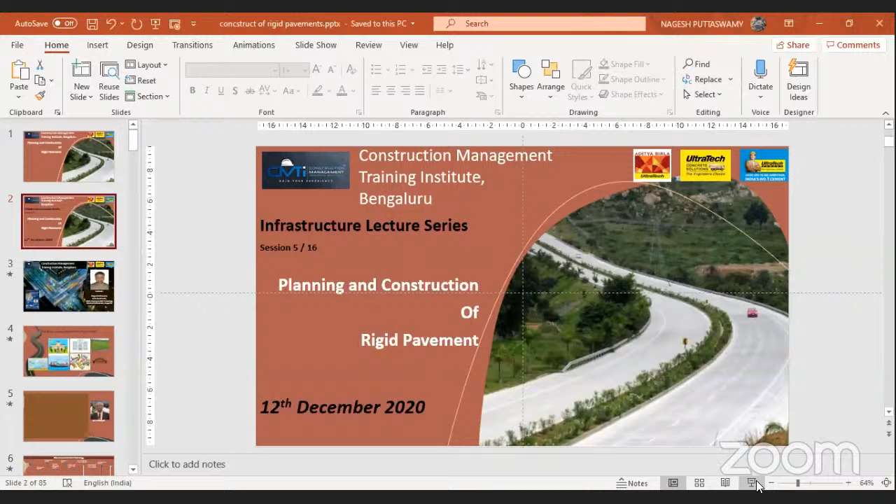Thank you, and thank you for that nice introduction. I would share my screen now. Yes sir, please. I hope it is visible now. Visible, sir, it is visible. Okay, that's fine. I'm getting a box here. I will minimize that also so that I will be able to talk about this.

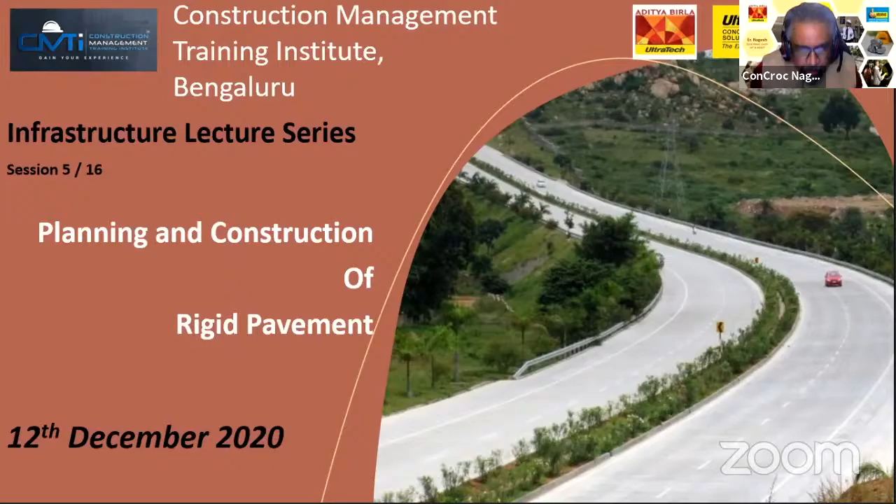Infrastructure is one thing that we all look at in a diversified way. Infrastructure for one is different, and infrastructure for another is different. When you look at infrastructure for the entire nation, it is on a different platform. It's also important to note that the way infrastructure is looked upon, and the way infrastructural development is taken up in any country today, depends upon various things. In many developing and upcoming countries in the top league like India, we have a norm that the best infrastructure available in the country will attract the best economics and the kind of business that can come in for that country's development. That is what I will be talking about, so let us go further.

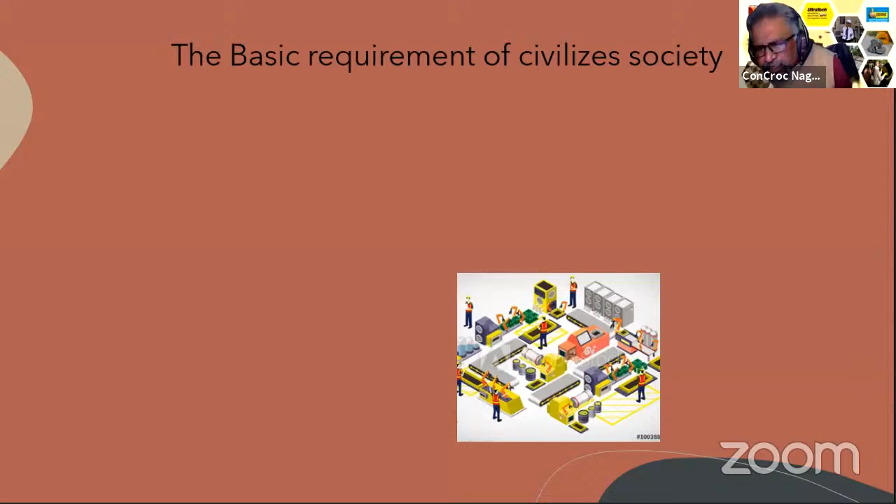So what are the basic requirements that always civilize the society? Number one, employment. I am giving an illustration of a modern or urban based scenario, but whether it is in agriculture, rural areas, or urban areas, there is a chain of employment. If one employment is generated, not many know that several other secondary employments will start coming in.

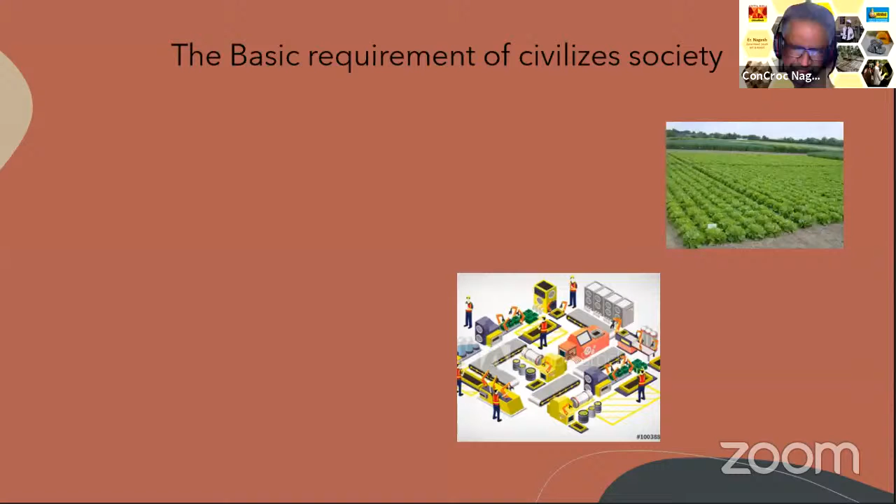Most of you students should have visited sites, because I follow CMTI very regularly on Facebook and other platforms. When you go to a site, even in a remote place, as you get inside the main gate, opposite to that you see a tea stall. Just a minute, I think somebody has got control of the screen.

Excuse me, sir, excuse me, please reshare your screen, I will find out who has control. Yeah, you can reshare the screen. Audience, can you support the program? Someone is having control. Okay, just ignore that scribbling on the screen.

What you have is employment, the secondary employment, and probably there would be a tertiary employment also. This is what determines the development and the necessity of development of infrastructure. I was telling you, when students visit a site, just across the gate, across the road, you would see one or two small tea stalls coming up. Are they employed by the construction site or the construction company? No. But because the construction activity is going on, one person or a family got a source of income. That is how infrastructure grows, and that is how infrastructure becomes very essential.

The second most important thing, which you often read about in today's newspapers, news channels, and blogs, is food. The countries that have to import the majority of their food are the worst hit in economics.

So, once you have these comforts, the demand for growing up... I'll do one thing. Sir, can you actually remove the... What I'll do is I will log out. I mean, sorry, I will unshare the screen and please share.

Now, 1 minute, let me take up the screen once again. I'm getting into several other things. Hello, yes, Ashok. Ashok sir, this is Somshakar from Ultratech.

You can just disable the annotation so that no one can write on the screen. Sure, sir, I am just checking where it is. Yeah, I will try to do it. Thanks for your input, sir. Welcome.

Sir, you can minimize the screen. Okay, right now what has happened is my PPT, your PPT has to come. I will just, I think the whole thing has gone from my screen now. Not an issue, sir, we'll wait.

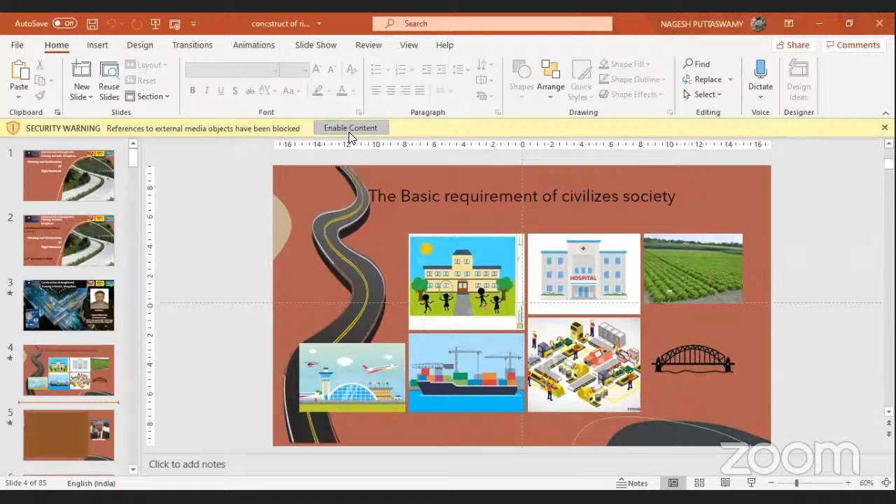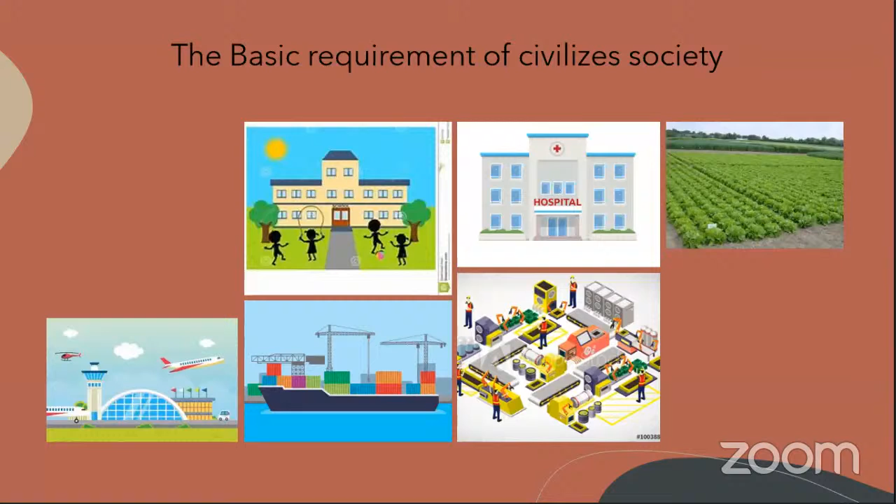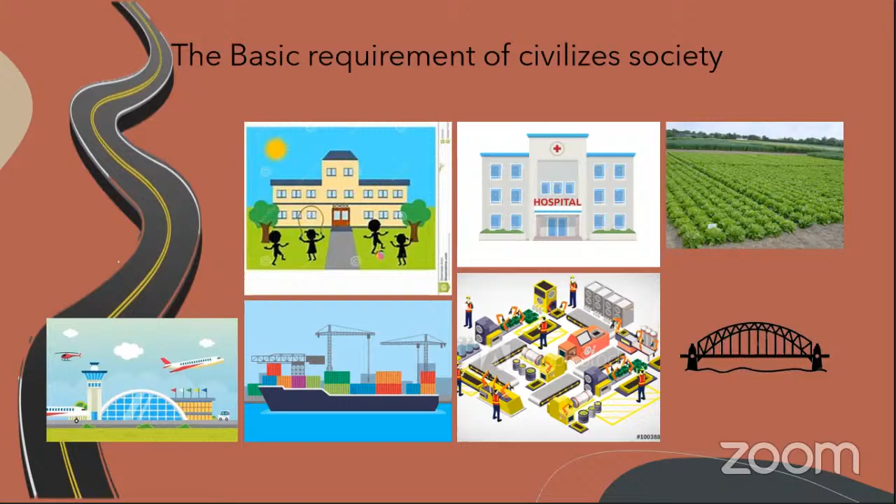Once there is a slight development of people, there is a slight comfort zone on the basic amenities and necessities required, education becomes a part. Education becomes a part, then healthcare becomes a part, then import or export or movement of goods become a part, and as the society grows, air traffic also grows. But what we are forgetting here, we are looking at all these things in isolation. One important thing is there should be a road which connects our home to workplace, or to my farm, or to my hospital, or to my school, or to the transportation. So this would be the best opportunity.

But basically I am not a transportation engineer. I got into concrete roads and white topping and these things because I am more of a materials man working for Ultratech. And I have a bad habit of understanding things before I do something, so because of that I got into this work.

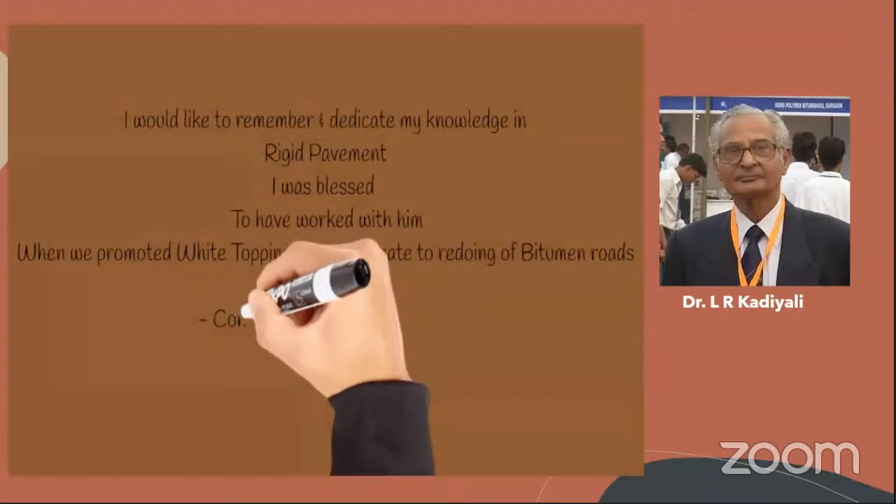Whatever it is, in 2008-09 I started working with a very well-known professor, consultant, senior - many of us have graduated by reading his books - Dr. L.R. Kadiyali. Whatever I learned, he is the one who opened up my mind to get inputs for these rigid pavements. Even though I started off with white topping, gradually I had to learn about concrete roads and the necessary things. So I dedicate this knowledge to Dr. L.R. Kadiyali.

Let me start by taking you all through a little bit of history. This is something I always do - whenever I learn something, I try to understand its history so I can understand in a better way how this technology evolved over a period of time. Because that is very essential - when I am learning something, there might be something already known and dumped because it was useless. So if I know the evolution, I know what to dump and what to take up.

So, how are the roads? There are milestones. All of us Indians should be very proud of ourselves, because Indians are the first people who even thought about having a road, or at least geometrical design of a road, the intersections, the way roads can be distributed within a city from village to village or place to place. The document of this is available in the Indus Valley Civilization, 4000 BC. That is something we all should look out for.

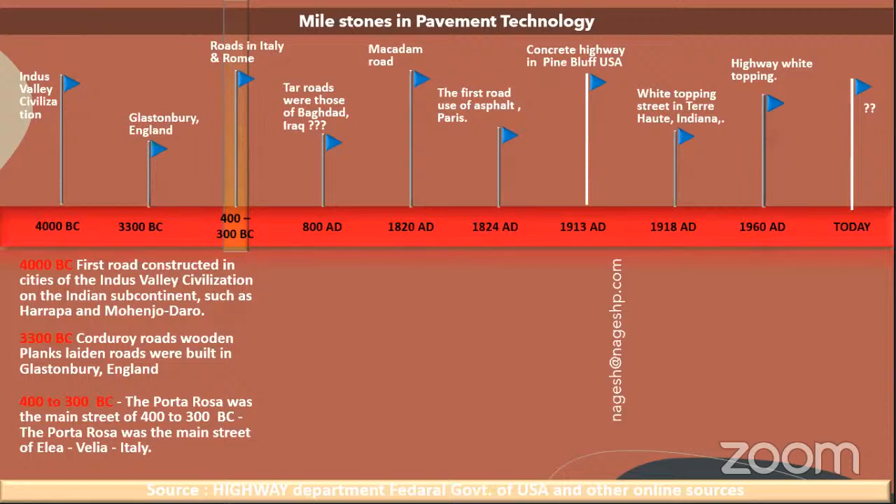Then you have England, which had a very crude way of road - they used to put wooden planks in the pathways wherever the chariot's wheel went, and these planks ensured the chariots don't sink into the clay soil of England. Then Italy came out, and we all know Italian roads - we always say that should be the earliest part. Now, these two things would surprise many people: roads existed in India 4,000 years before Christ, and in England about 3,300 or 4,000 years ago.

The progression went on. Of course, the most durable roads were built by the Romans, because they started using the concrete of those days - the pozzolanic ash from the volcanoes mixed with horse hair and a little bit of calcareous material.

So that is how we made there. But this is something that I have read, and I have been trying to verify for the past 15 years. There is not much documentation available which would substantiate that this was happening.

But there is a document which says around 800 AD, there were roads that were sophisticated, similar to the bituminous roads of Baghdad in Iraq. Then, as all of us know, the Bhishma Pitamaha of engineered roads, the Macadam Road, came into being.

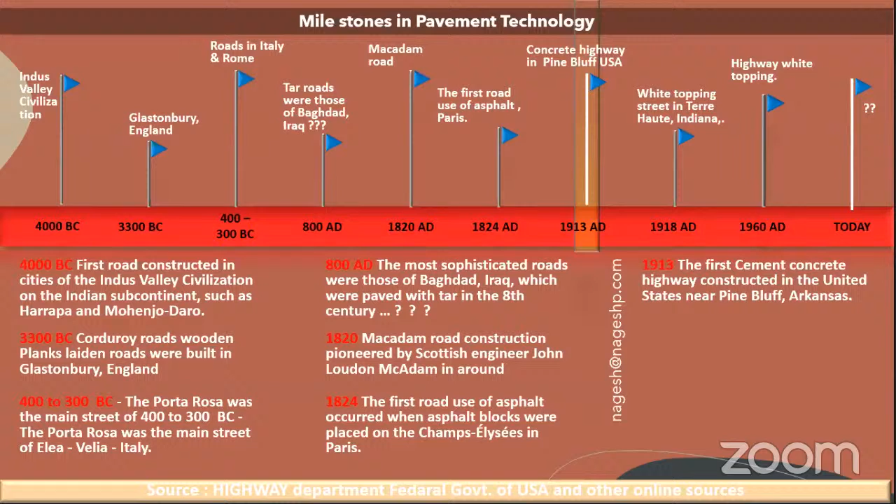Then they also went on to understand the advantages of a concrete road, and the economics of having a concrete road over a period of time. They thought about what to do with old roads. In initial stages, probably they were digging out the old bitumen road and building a concrete road in its place.

Then some intelligent person - people who think odd, who we popularly call crackpots - one of those crackpots said, why not utilize the residual strength of the existing bitumen road and put concrete on top? That way the wear and tear from new loads would come on the new material, with the bitumen as a supporting member. Thereby a hybrid of bitumen and cement concrete came into being, which is white topping of roads. Somewhere in the 1960s, even highways and national highways were white topped in America.

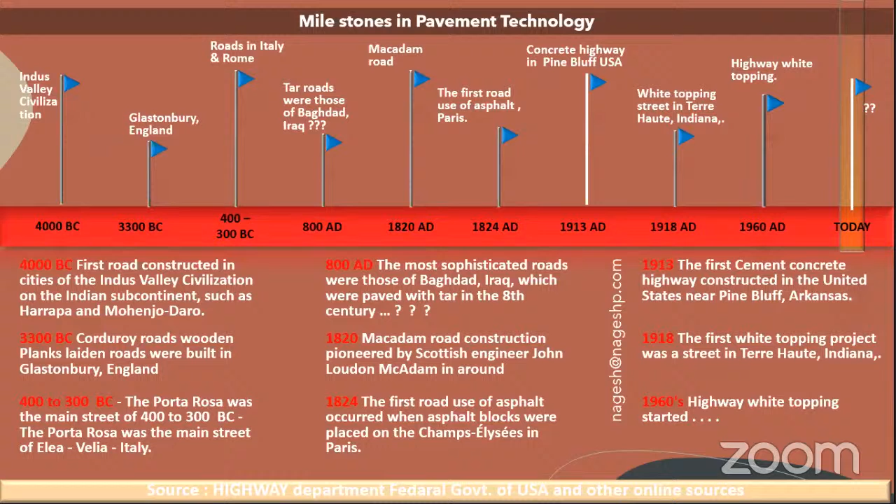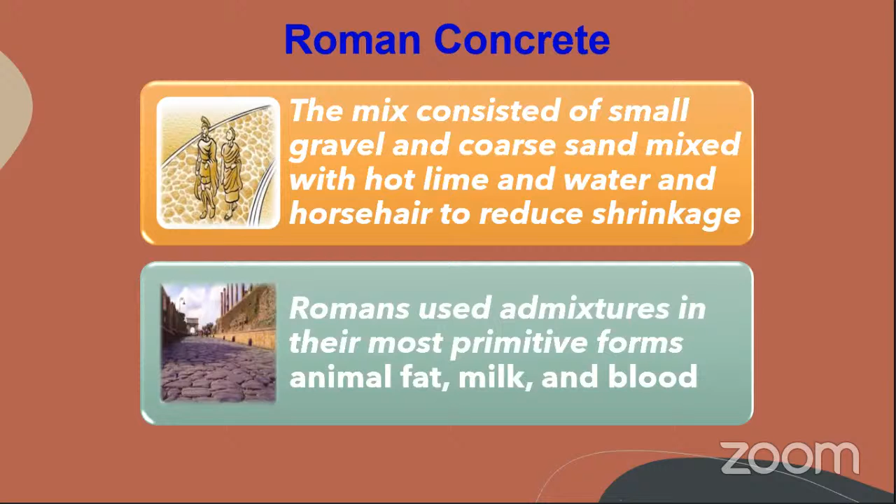Gradually things moved on, but at least in India, we missed that bus for various reasons. I will take that up in my next few slides, where we are still debating bitumen versus concrete. These are some statistics we have - documented or archaeological evidence that substantiates this.

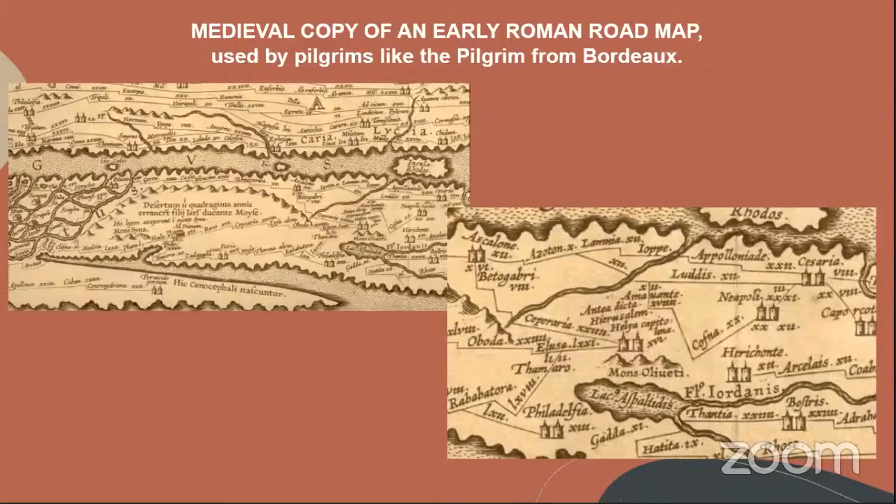If somebody has a sharp vision, you can see many places, even Napoli and other places, are still there in Italy. These were connected by similar roads - may not be the exact replica of what exists today, but the material was similar, though the construction methodology was different.

So in India also, we have been using concrete roads for ages, at least from the 1920s, 30s. If you go to many cities or areas that were ruled by the erstwhile Maharajas, some of the roads they frequently used were made out of concrete.

I've seen this in Mysore, I have seen this in Bangalore. The Mysore highway was once, when I was a kid, a concrete road, and parts of these roads are even today visible in Mysore city, in areas between Mysore and Bangalore. If you go to the older part of the city, you can see these roads still mentioned: MC Road, Madras Kannur Road.

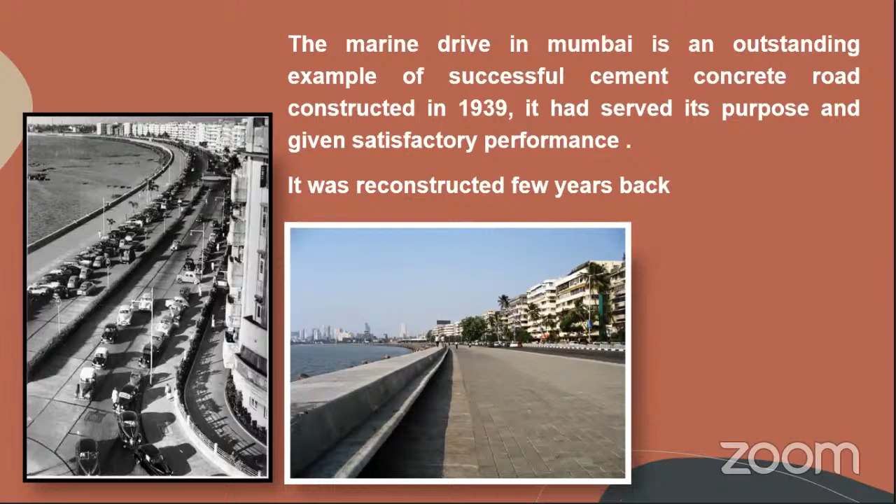This is the Marine Drive, also called Queen's Necklace, adjoining the sea. Until almost 2 years ago, this road had been maintenance-free for many years. As traffic increased, widening of this road became required. So a couple of years ago, this was redone, again in concrete.

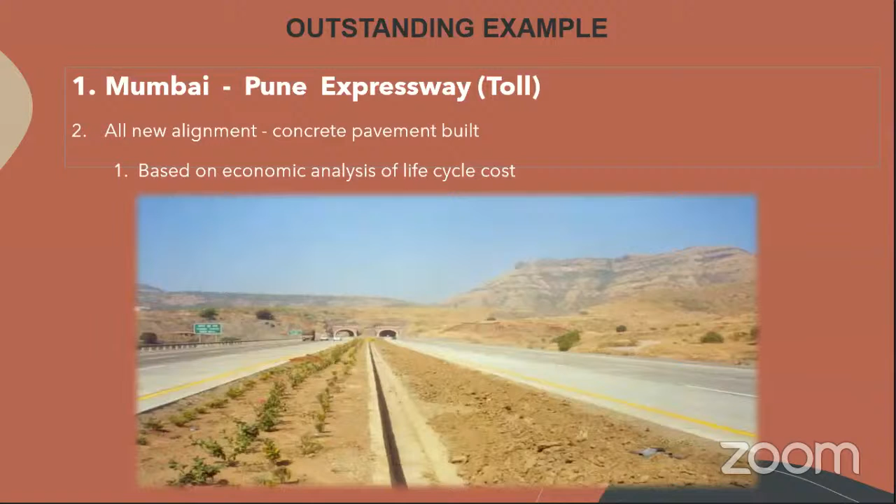Another thing we have adopted over a period of time, aged enough to understand its performance, is the Mumbai-Pune Expressway. Now, this scenario - why concrete road took a back seat, or why it did not take off from 1913 - is something everybody is worried about. These are documented even in textbooks.

One factor is the cost of new roads to be built - the cost of constructing a concrete road versus the cost of constructing a bituminous road. In earlier days, most engineering projects were based only on initial cost. Nobody bothered about how efficient the construction would be over a period of time. It was simply about what I spend now.

So that was a question mark, for various reasons, like cement was not produced so much in India in the early independent days.

Because cement was imported, it was expensive, and bitumen, being a waste or low-grade material of petroleum products, was available quite cheap. There was a huge cost difference between bitumen and concrete or cement. The government took the decision to use bitumen because it could be easily imported, whereas cement was expensive and needed to be reserved for other infrastructure like bridges and dams built during the 5-year plans, which emphasized agriculture. This gradually led to a new thought process about the cost of maintaining and keeping the road fit.

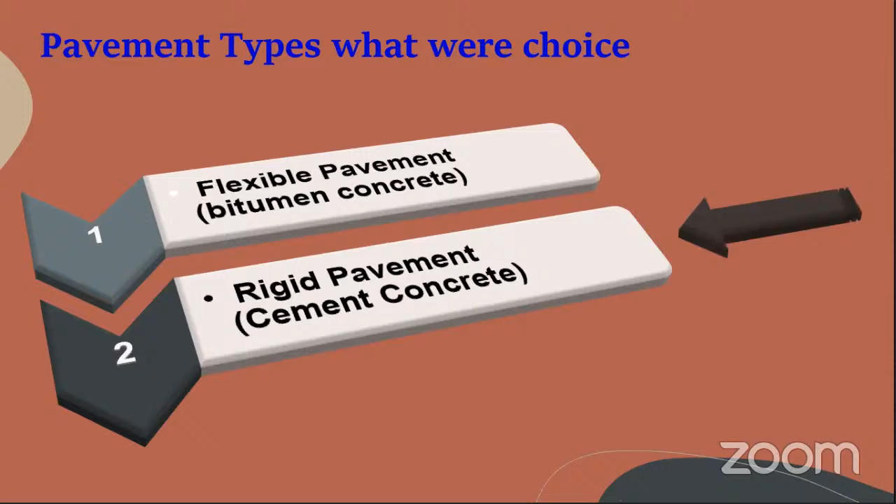Now, in this entire series of lectures, I will not go back to flexible pavement much, but I will talk more about, or absolutely in line with, rigid pavement. But there are some practices that have evolved over a period of time with concrete roads, or rigid pavements, which are very nice to be adopted in all types of roads. There, I will refer to them.

I said cost, lack of funds, and the availability of bitumen being simpler than cement - all these things, especially in those days, you have to look out for. Very, very important is this: with not-so-skilled labor available, any defects in the construction process could easily be redone in bitumen, whereas it was not possible with concrete road.

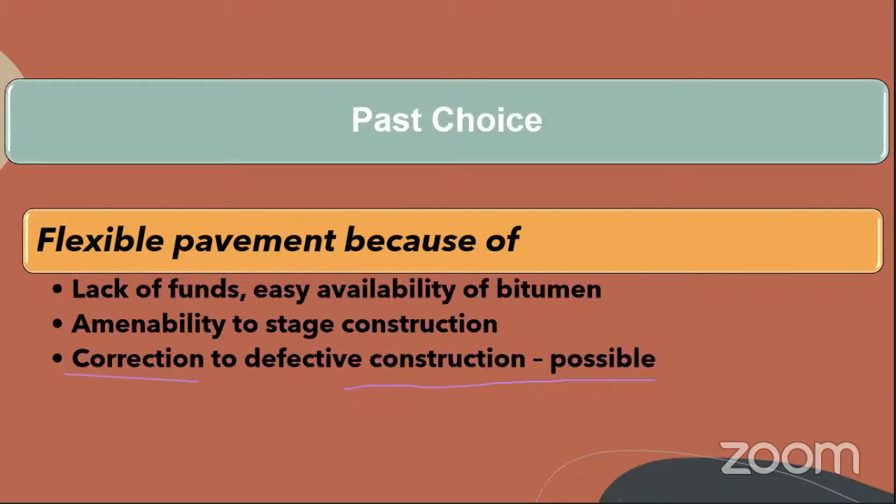Nowadays, there is a new concept we have to look out for, because mechanically we have improved automobiles to such an extent that trucks these days carry 3 to 4 times the load that trucks of 25 to 30 years ago were carrying. The speed at which these vehicles move is different, safety and durability matter, and there are so many vehicles on the road. Even if I want to do re-bituminization of the road, especially on highways, I have to close a particular lane, which is a very cumbersome process. Then looking at high design life - I mean, when I say design life, it includes not only the actual core life of the structure but also what I must do, because most bitumen roads need an overlay every 5 years, and often a tack coat as the wear and tear changes.

Then the demand for roads is so much that the government doesn't have money to invest in new roads. In any general budget, I have observed for about 7 years, if 1 crore is allotted for roads, about 35 to 40 lakhs goes into the repair of existing roads based on their importance. So what is happening is, under some pressure, I build a road but cannot maintain it, and at the end of 6 years, if I go back to the same road, I hardly see the road.

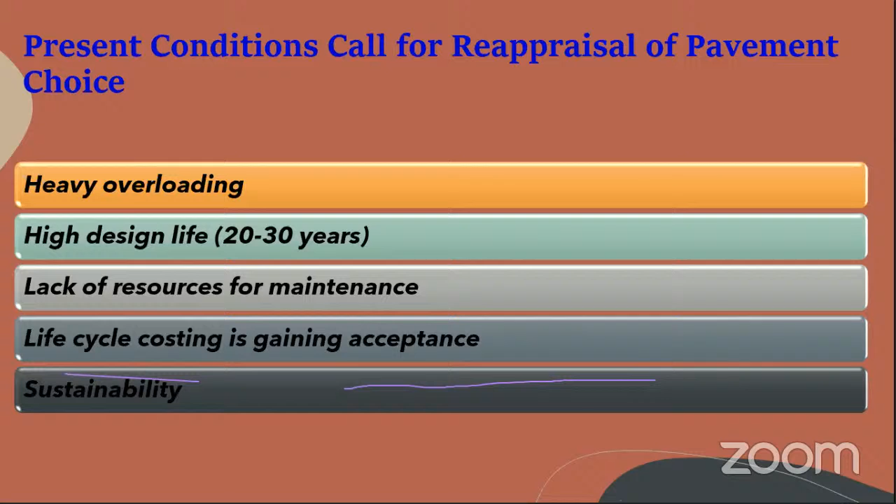So there is lack of resources, and people understood after seeing all these things that life cycle cost is a very important thing, and sustainability also has crept in, especially in the past 12 years. People are looking at natural resources being depleted. Now, what about energy efficiency? All these things have become the talk of the town. Now, at this condition, we had to have a relook.

Let me give a small input here. Yes, it is my personal opinion, and it is some observation done by like-minded people. Faculty members here, please excuse me, this is totally my personal opinion. It is not a general rule that everybody should think about this.

Now, what has happened is, at least when I was doing my graduation about 35 years ago, not much emphasis was given on the teaching of concrete road design. We all learnt about it as a bypass, because in those days, even 30 years ago, I'm talking of the 1980s, many of our teachers said it is hardly done in India because of exorbitant cost. So what happened?

That got into the young brains sitting in the last bench. I was a very popular man in the institute, I always used to sit in the last bench in the classroom, and I was always on stage when the college fest came. That is the life that has led me here, that has opened my eyes to see a lot of things. So people like me said, if it is not being seriously adopted, why should I learn about it? Anyway, out of 8 questions, I have to answer only 5.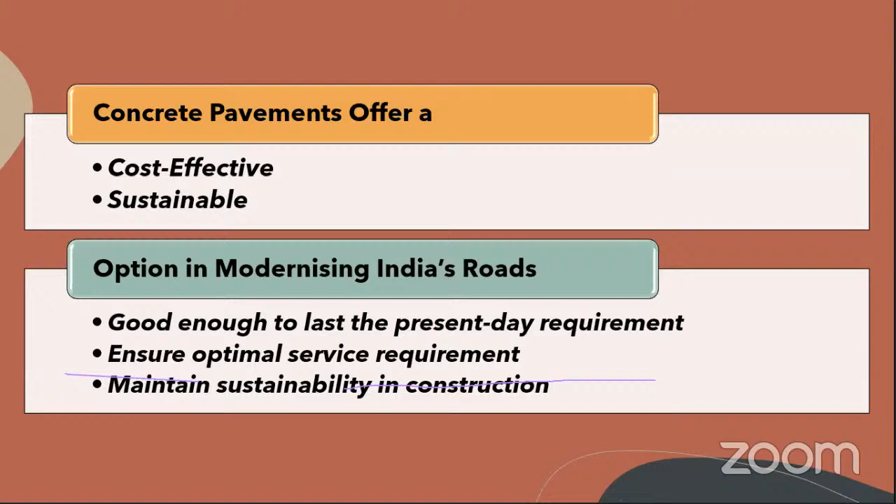Then it ensures an optimum service life, because the way we look at projects has changed. Somebody building a house a little late after taking the site need not dig through the road. Today we have learned methodologies to ensure that people don't dig across the road, and maintaining these roads has become very, very easy.

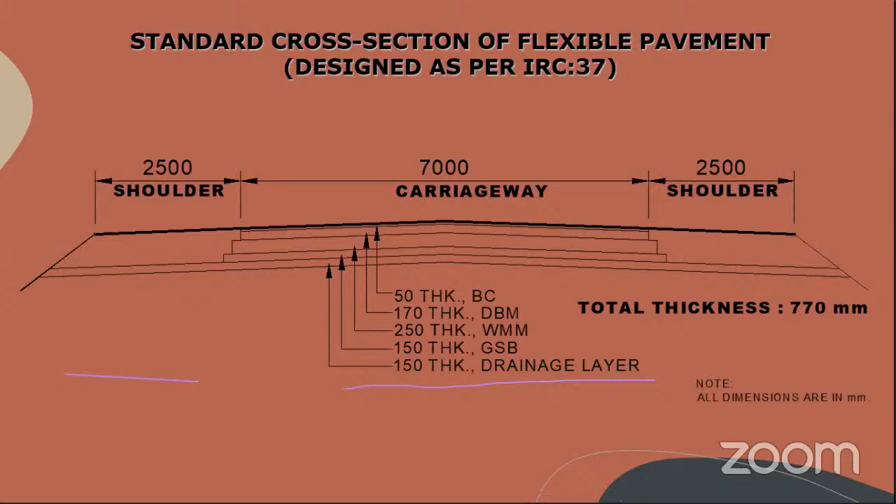Typical, these are the sections. You can see here there are 1, 2, 3, 4, 5 layers of construction that goes into your bitumen pavement. And when it comes to the standard sections for a rigid pavement or a cement concrete pavement, it can be as simple as 3 layers.

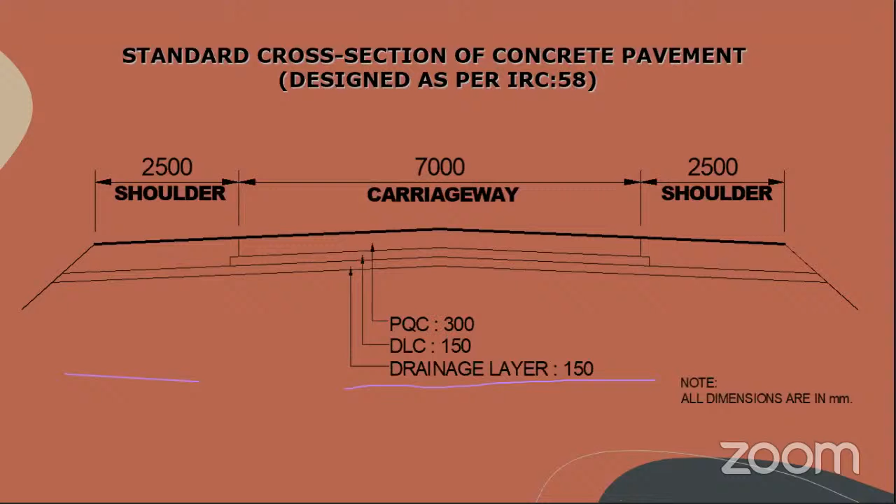But what's important here is look at the drainage layer. It is important in both the pavements. Drainage layer is very important. Moisture accumulated below the road surface, especially in the natural soil, is the worst enemy of a road's durability. Water is essential for construction, but water is a poison for any construction after the service life has begun.

But what is happening here? The construction of rigid pavements, we have to move towards it. We have to move, but there are several hurdles that have to be crossed, because concrete roads have not seen an evolution. They had gone to a back seat, and suddenly somebody woke them up and said, come on, come on, your destination has come. I suddenly wake up, wipe my lips, shake my head and get up. So that is the situation.

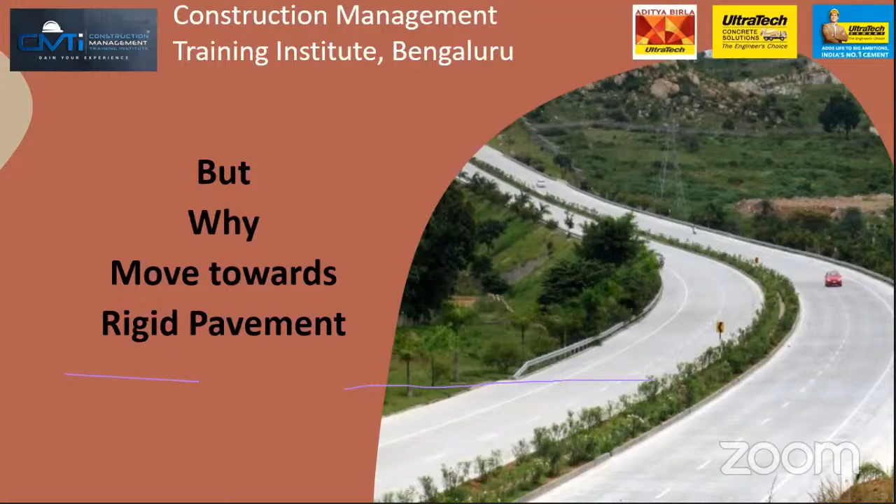And another important thing is, because I believe in understanding the problem first and then looking for a solution. Don't become a monkey to ape anybody. That is what we are doing in many cases in India. We try to ape fashion, we try to ape the culture, we try to ape the behaviors of various things, and we get into trouble.

Very important that you need to look at is the technology of the petroleum industry has improved so much. They are trying to reduce bitumen because the other products are more profitable for them to produce. So there's the refining technology on one hand, and the crude oil production is reducing because we are exhausting it. Two things are going against us: the crude oil is reducing, and the technology is making less and less bitumen available after distillation of crude oil.

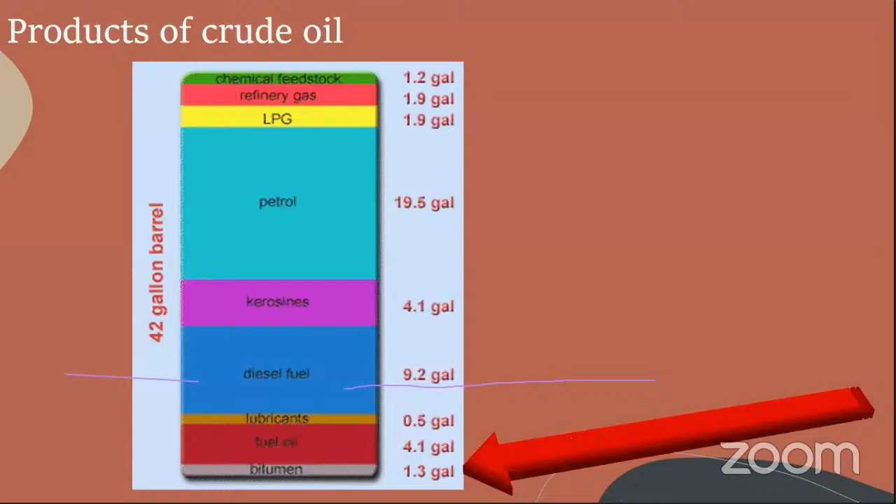It is predicted that somewhere around 2025, our oil production or oil availability will be the same as 1965. It's not that oil will not be available, but this is the reason there is an acceleration going on in understanding and constructing concrete roads or rigid pavements.

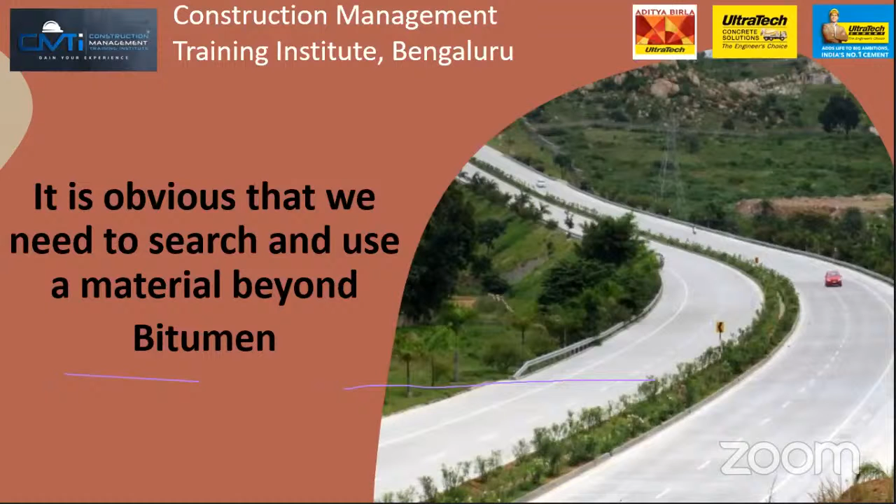So when it comes to rigid pavement, yes, these days, even though history says a different story, many countries have started adopting white topping also. Thereby, in rigid pavements, you have got two types: one is a regular concrete road or a regular CC pavement, and the second is CC overlay over bitumen. Instead of redoing the whole good road that is available and has come due for relaying, go with a cement concrete overlay. So these two technologies are available today: the regular concrete road and the CC overlay of a bitumen road.

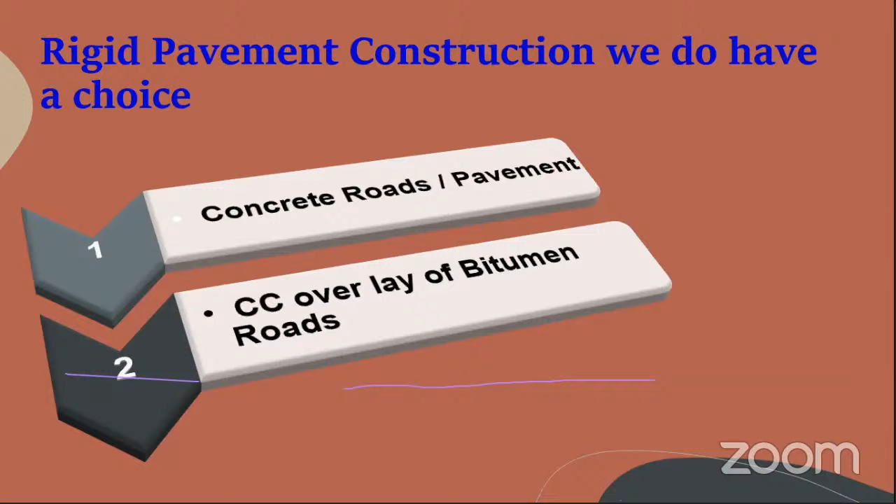I will touch upon the CC overlay in my next lecture, where I will take you in detail about a few things. Let us worry about the other aspects of it now.

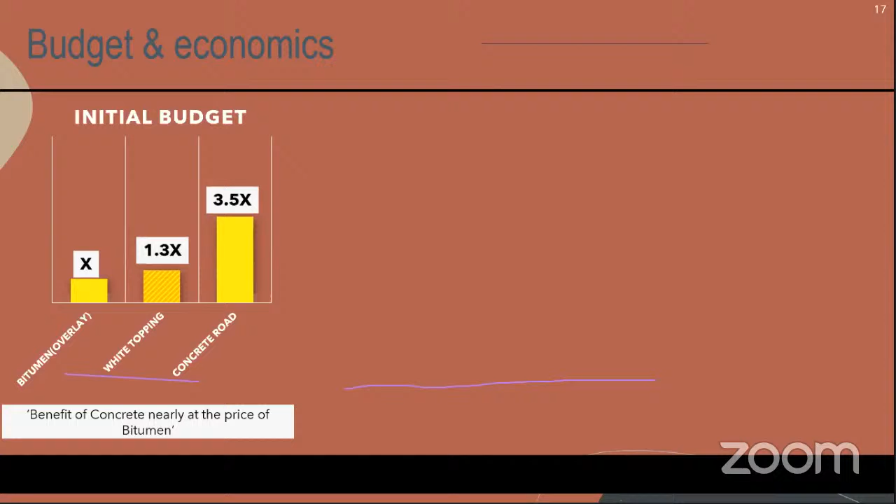Now, very important, and what luckily has happened to the pavement engineer is we are becoming better planners of roads. We are becoming better planners of roads. Why? There is a budget involved. We have understood that if bitumen costs X, the cost of a concrete road of equivalent capacity and condition will be about 3.5 times more. Whereas if there is an existing bituminous road and I increase the strength and efficiency of this road, within 1.3x I can redo the road, which will last for 35 to 40 years and ensure that the money that would have gone into various servicing would be available.

Another thing that was always on the back of our mind in the earlier days and even today is, sir, if I have a bitumen road, I can put the bitumen concrete today and allow traffic in 2 or 3 hours. But on conventional practice, the concrete road needs 30 days. As a concrete person, right now we are not very well equipped on site conditions to open regular concrete roads on a fast track mode, because whatever be my material science, whatever be my design skills, whatever be my supervisory skills, whatever be my equipment, ultimately the labor working at field are not well equipped to understand this very complex material.

Very complex material. Professor M.S. Shetty, another good friend of mine, always says concrete is an enigmatic material. The more you feel that you have understood it, the more complex or more hidden things will come out.

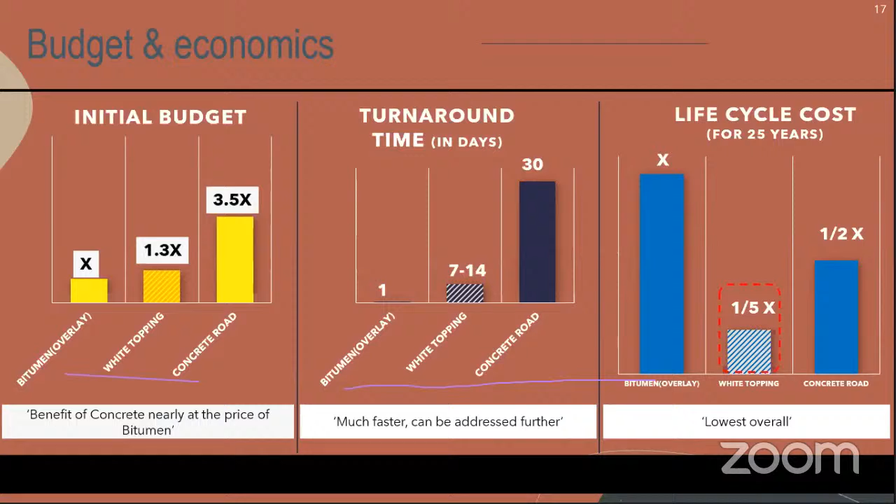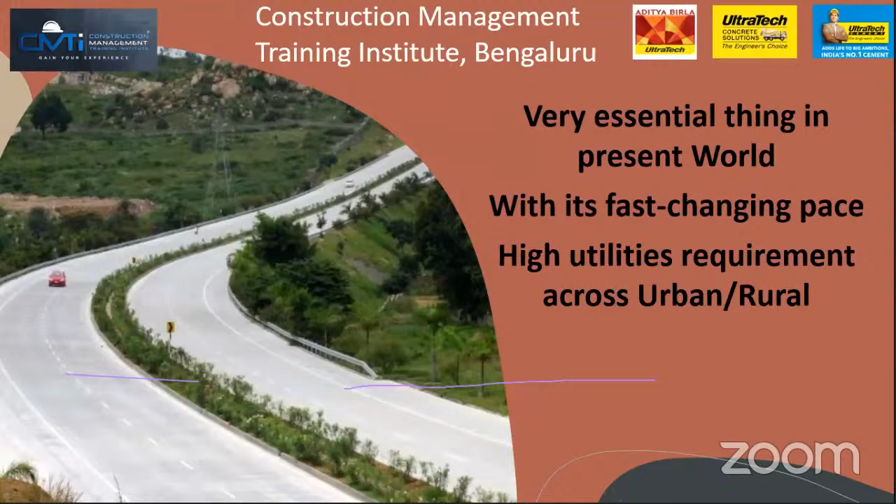Now let us see what is essential in the present world, with its fast changing pace of society's lifestyle and higher utility requirements across urban and rural areas. Like it or not, in every highway today, every fifth, tenth, or twentieth kilometer, you find a small room-like structure, about 3 meters by 3.5 meters, which is an inspection room set up to look after the communication cables running parallel to the road. Many utilities, settlements, and services are bound to come around the roads and highways being built. Like it or not, domestic electrical lines, communication lines, and other utilities will have to run parallel to the road, because I cannot build one more service road just to look after them.

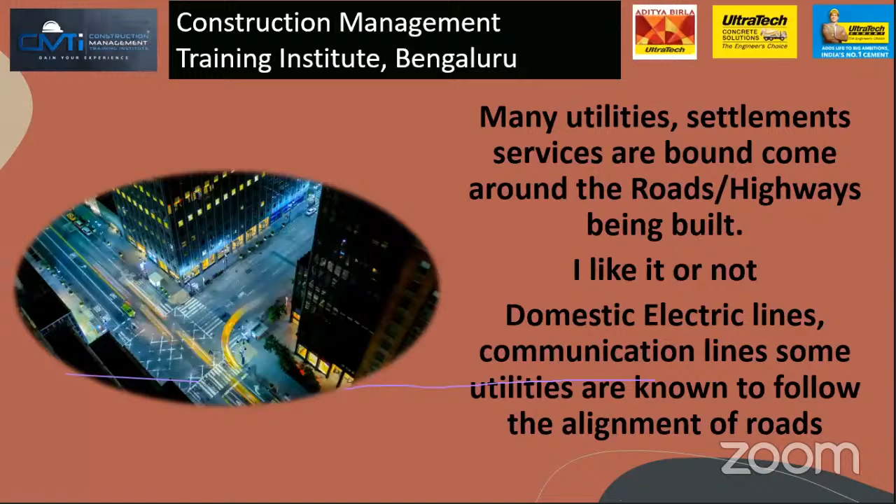In earlier days, we were doing this differently. If somebody goes towards Kanakapura from Bangalore, you have a service road built by BWSSB. Why this road? Yes, some villagers use it to go to their farms or agricultural land, but this road was built exclusively for engineers and maintenance staff to go along the pipeline bringing water from near Kanakapura to Bangalore city. It was built only for inspection purposes. But these days things have changed, and they try to put such infrastructure very near to the highway itself.

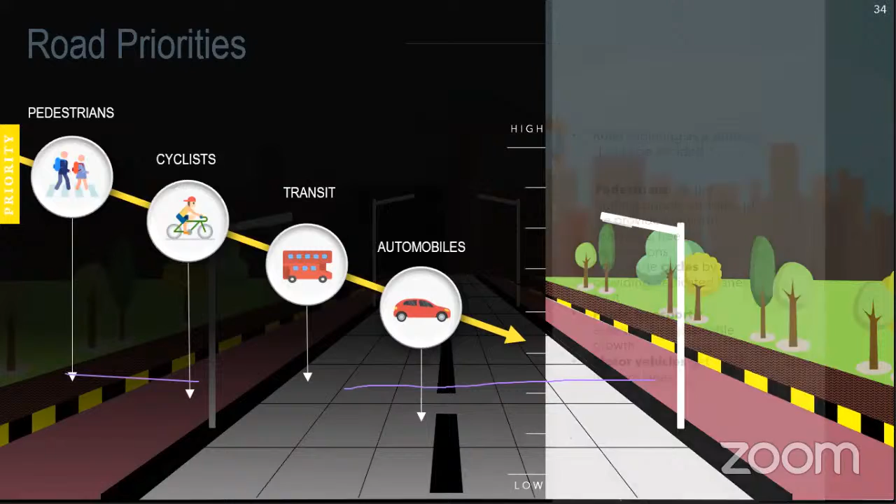When it comes to the urban scenario, things have changed. Even when I say urban, don't just think of cities—it could be a district headquarters or taluk headquarters where similar facilities exist. They want Wi-Fi, internet connectivity, telephones, state-of-the-art cable TV networks, and good hospitals coming up even in smaller towns. So road priorities in urban centers put pedestrians first today, because pedestrian accidents affect the flow of road traffic the most in developing countries. Then come cyclists, then transit, and then automobiles. That's how we look at these priorities these days.

According to that, today an ideal thinking is going on this line. This is actually urban-centric detailing that we have done, but a similar thought process applies even to small places, because roads have come up, houses and shopping centers have gone up. So even drainage is very important in a small taluka headquarters, because the highway has come up over time. Now water drains out, so there should be a drain even in a village along the highway. After leaving the village, you may not need the drain, you can let it go to the field, but in the village it is required.

So there is a stormwater drain requirement, and a separate independent line is being thought of for cables. There are two kinds of cables, and we have to understand these technologies. The cables that carry power lines or electric power, and the cables that carry data, interfere with each other, so they have to be handled in separate ducts. This is how planning is going on today.

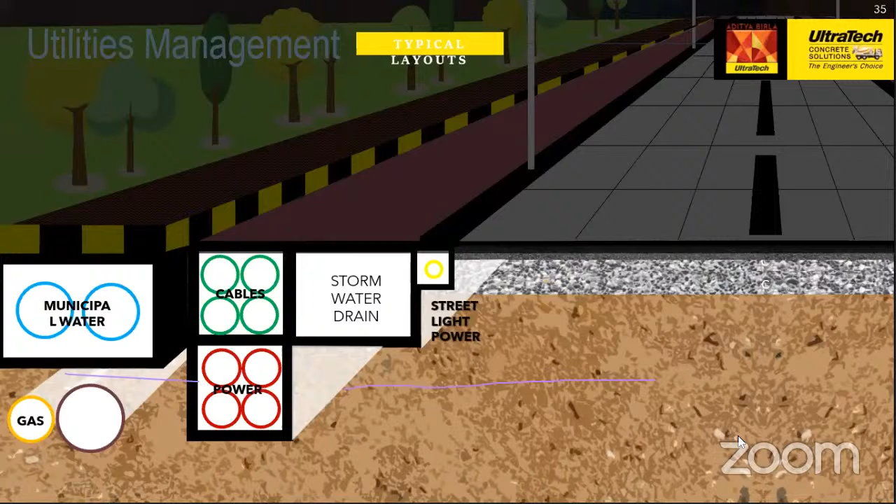So ultimately drainage and other things will come in case of a city. These two will come, you will have gas lines and municipal lines, all being planned today on either side. Why? So that nobody needs to dig across the road to give a water supply connection, a sanitary connection, or to take in electricity. We are trying, and this is how things are being planned.

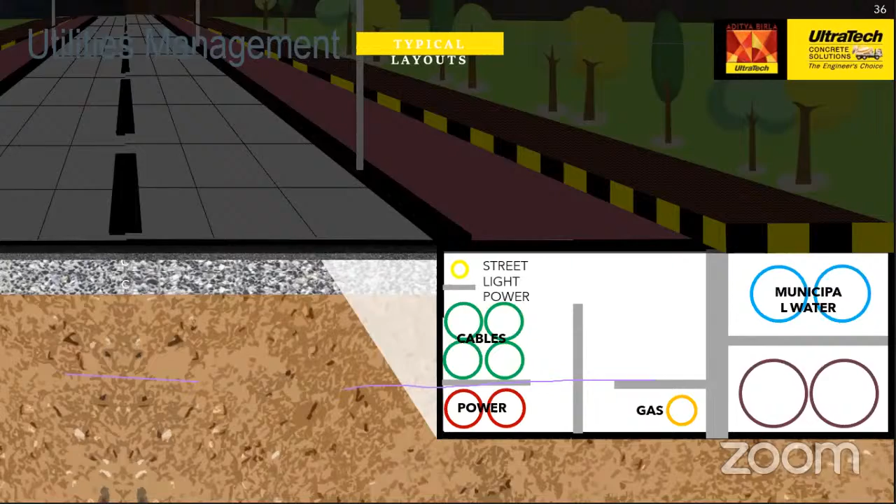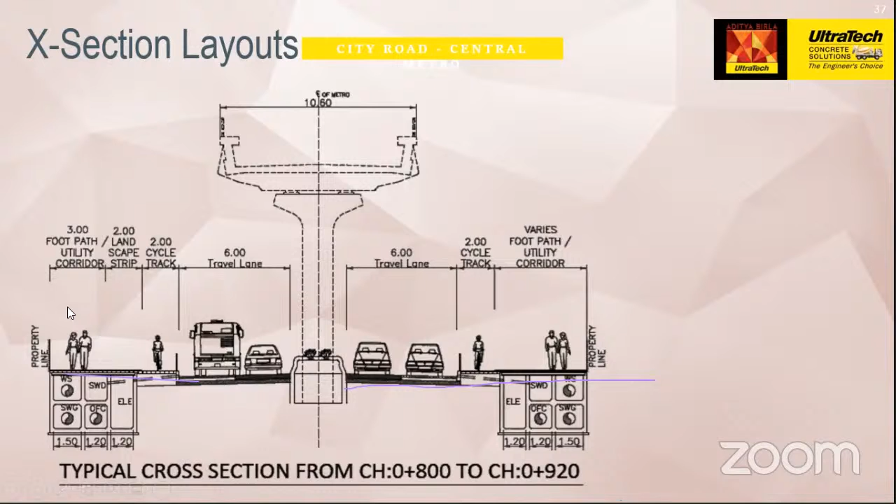And on a complexity note, you know that multi-layer approach many people in urban centers today are aware of. They will have a metro or a flyover going at one level, a footpath at another level, and ground level traffic. These kinds of things make road construction, the pavement construction, very complex.

So let us come back, that is all about planning, the way you can think about it. But when it comes to rigid pavement or any pavement, this is very important. One is the design. Codes are available, data, much of which is available through direct or indirect sources, and there are established methods of making a traffic survey, very well known methods. And there is a well-known methodology for analyzing the data or survey data that is collected.

Then we have to document all these things. Documentation doesn't end there; documentation includes several things I will come to. Documentation of the data, documentation of the requirement, documentation of the soil, documentation of the geometry, and then coordination with various agencies, because no longer is a highway just a highway. A highway does have certain utilities running adjacent to it.

Suddenly there is a village, I want to take a deviation; suddenly there are accidents, I will encroach upon or notify and take charge of the adjacent land and widen my road, or create a small island. I will have to coordinate with other agencies who have their cables or power lines lying next to us. We will have to ask them to relocate according to the profile.

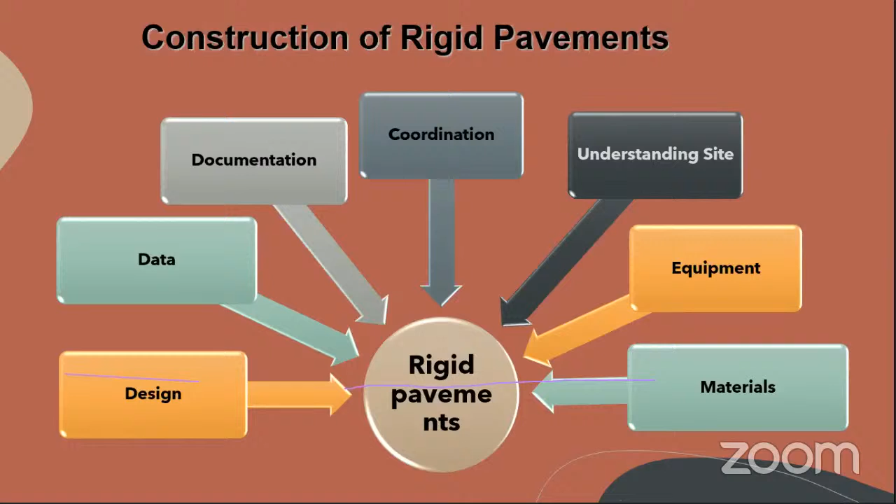Then comes equipment, and then comes material. Equipment and material are dependent on the first two things. Coordination and understanding the site involve equipment, because based on site conditions you may have to choose the equipment. Once you choose the equipment, your materials have to be modified to be suited for it.

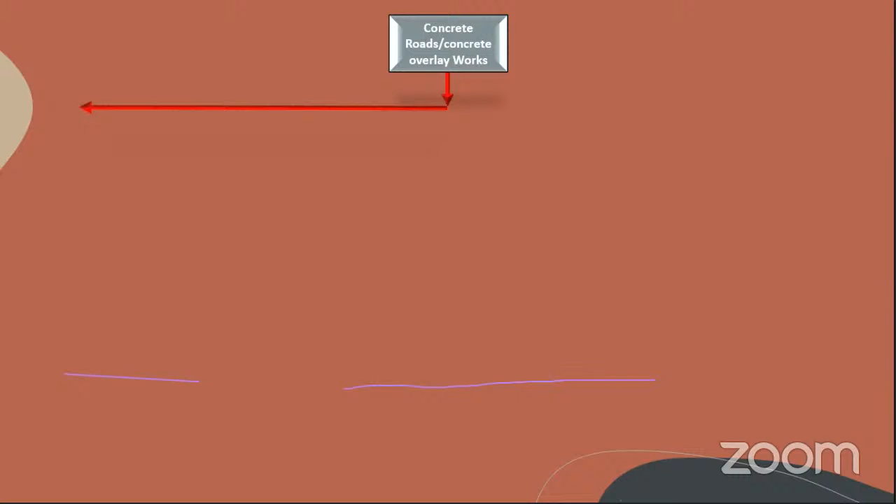So when it comes to concrete roads, overlays, or rigid pavement in general, this isn't just for rigid pavement, it's a general category for all projects. Ashok would agree with me.

One is the administrative and documentation aspect, which is very important, and documentation done the right way. I will say especially in the urban scenario, I have faced problems when doing roads. We have found that the documents available with the agencies are different, and the actual position of the water supply line or the sanitary line is something else.

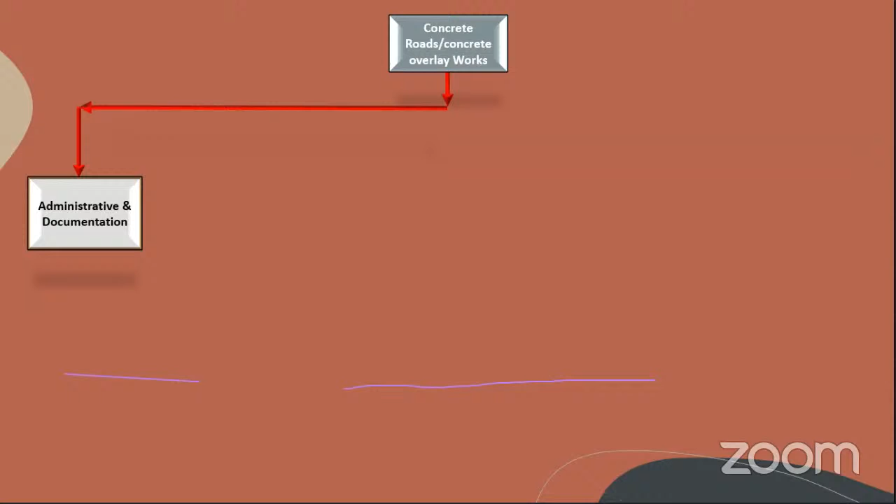Many documents have not been updated. There are multiple documents available, so it is very important. One is drawing up the specification. Codes are available, and established methodology is available for this.

Tendering is where something is going haywire as far as rigid pavements is concerned, because rigid pavement is an extended period of construction. There are some allied works coming along with this. I will give examples as I progress towards the methodology. For example, if I'm doing a concrete road, the concrete stays wet and susceptible to footprints over a period of time, say 5 to 10 hours.

At this time, I need to protect people from walking across, and protect animals from walking across. So I need to have a barricade done. This barricade in many cases is forgotten as an item in the tender document. When actual construction starts and trouble starts coming in, the supervising engineer will say put it across. But that is not covered in the tender, so the contractor refuses to do it.

I start the construction work. Suddenly the cable fellow comes and says, no no no, to cater for this village my cable has come from the right side of the road to the left side of the road. Somewhere here we have put a pipe and taken it across. Now you have to locate that. All these interactions should be there.

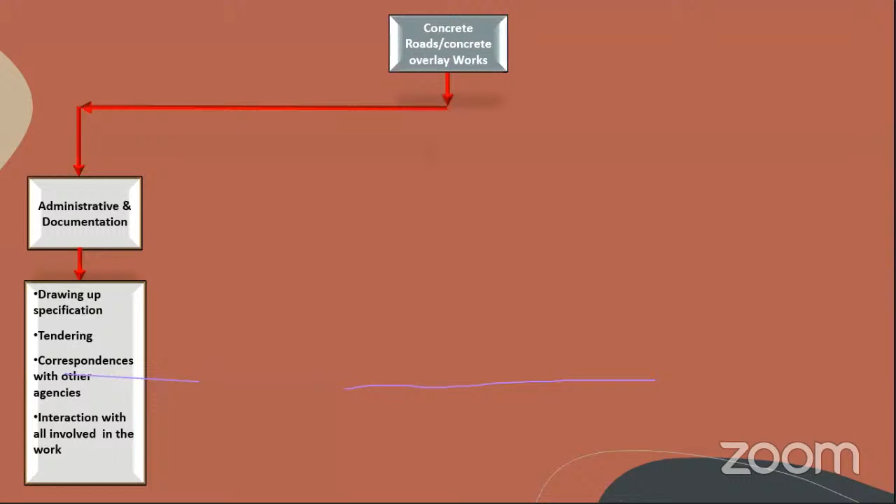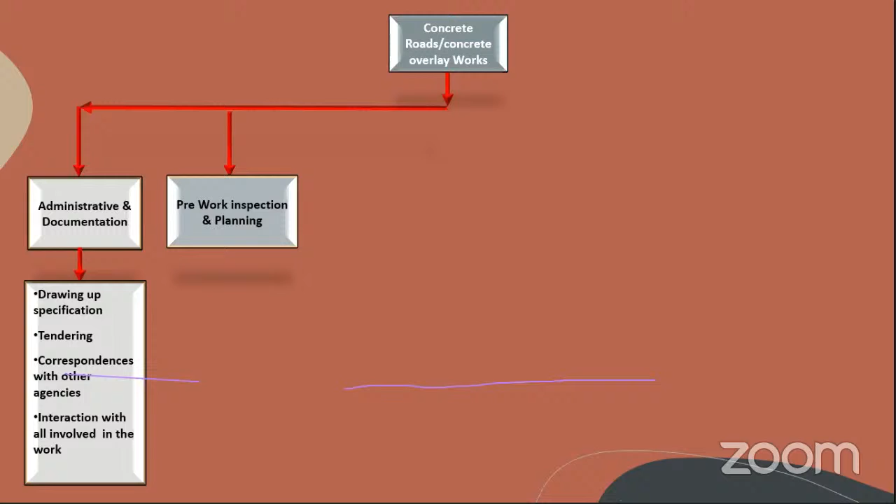Then there is pre-work inspection and planning to be done according to the site, after drawing up the specification and everything. Based on the specification, what are the hurdles that I might face? What are the plan Bs that I should be ready with? Identification of problems, service lines, interaction with telecom and electricity boards—all these will have to be there.

A very important thing is to look at the traffic scenario and the traffic administration, because they will be the ones who will know. In many cases, once you go out of a township or human habitat, in the majority of cases it's the local shepherds or local farmers who will give you the input. Sir, this road is very straight, people will come at very high speed, and a lot of accidents happen here. Sir, people will come in rainy days and the vehicle skids into my road or my farm. All these inputs come from there.

This is what I have to look out for, and this is how I have to pre-plan my plan B. And then when it comes to concreting, there is a series of work. I will tell you in detail about it.

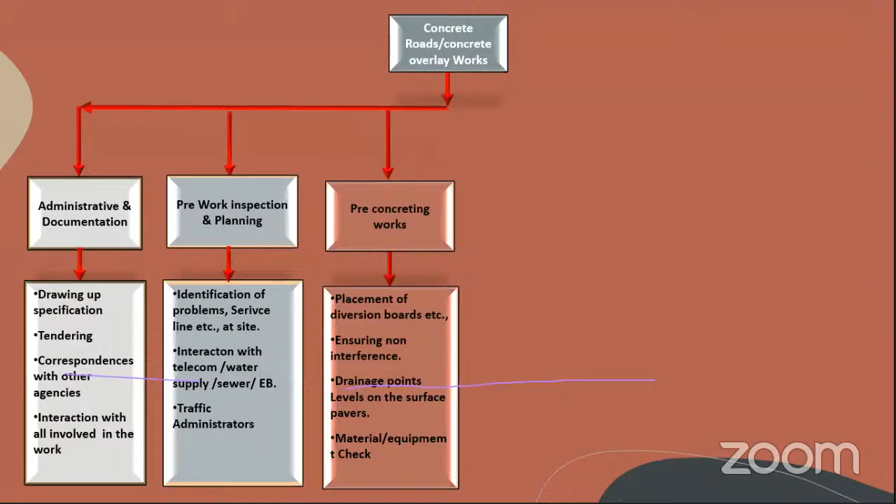You have to ensure proper signages are given, proper protection is given, and proper warning signals, especially the warning signals. Because even in a city like Bangalore, I have seen very well-educated people hold their mobile phone while there is work going on, a tape stuck there in multiple layers—they lift this tape up and cross over, walking on the fresh concrete. The civic sense is very poor in India. We will have to look out for this.

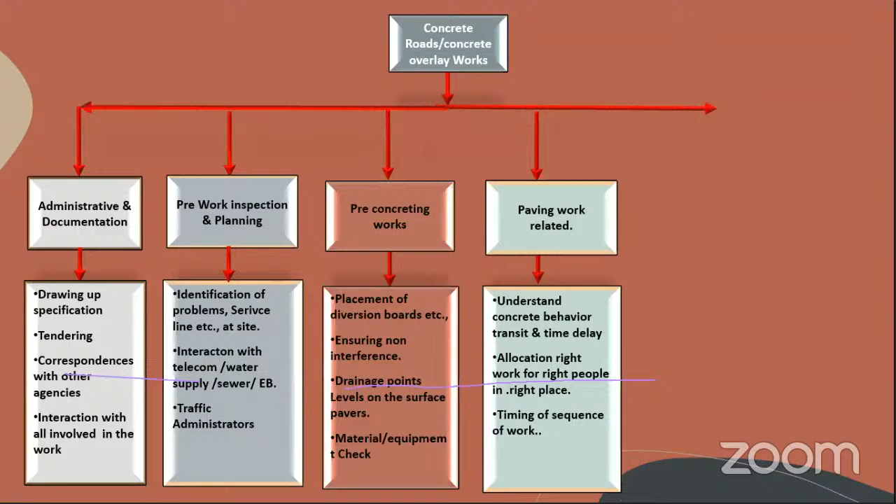When the actual concreting starts, some precautions are taken. We have to understand where the concrete is manufactured, how long it takes to reach the place, what is the shortest duration, what is the longest duration it might take, and then allocate the right work for the right people. Don't just assign work by seniority or experience—you have to think whether that person is suitable for that job or efficient in it, and the time and sequence of work will have to be maintained.

Very important in the paving work is the machinery you are using—what are its limitations, how you have to feed concrete, what slump is required, and what allied works are related to that. All these things will have to be looked at.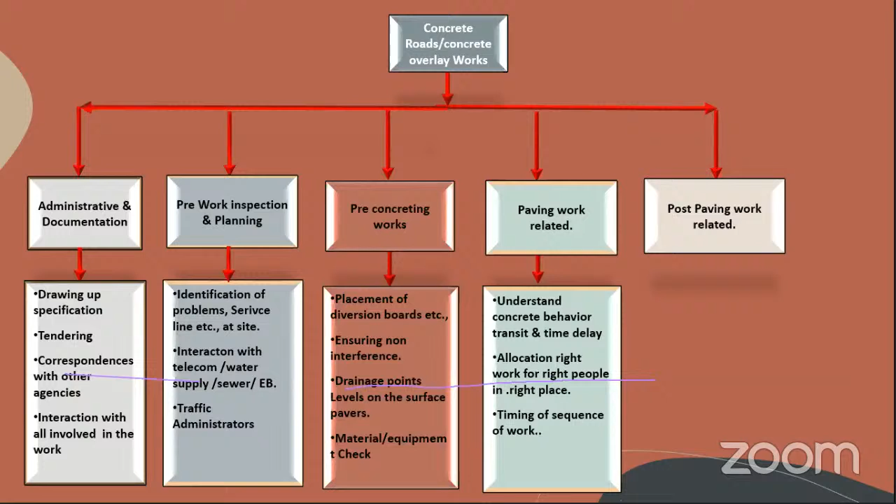I request everybody, especially the youngsters, to please learn all these things as a whole. Don't think that pre-concreting work is somebody else's job, that you are only a designer. If you never take care of all these things, if you are a person preparing the document who does not mention all these things, it will not be a contractual obligation on the part of the contractor to do them.

So these are there. Post paving, there should be a verification of possible errors right when the concrete is green, so that if something needs to be done, you can redo it. And then there are processes like floating and texturing that have to be done in time.

Today we are not at all relying only on water curing for concrete roads or rigid pavements. We are having alternate methods of concrete curing, which is called curing compound.

You have to use only wax-based curing compound because they actually become an impervious layer, whereas there is an acrylic-based curing compound also available. Acrylic actually seals off the surface pores of the concrete for a definite period of time and ensures that water is not evaporated. Well and good, but prolonged exposure to water or rain might dissolve the acrylic that is there, and the concrete gets exposed back. So this is something we have to look out for.

So verification of the curing compound and documentation of important issues are necessary, because please remember, concrete roads cannot be repaired just like that. You have to plan everything, you have to bring equipment. Now, if while doing concreting you observe something, that has to be documented properly with the chainage, what problem occurred, and how you handled it during the work. This should go into the permanent document which is available even well after I go, so that my grandchild or someone two generations later who comes to repair this road has a document which says, yes, this thing had happened here.

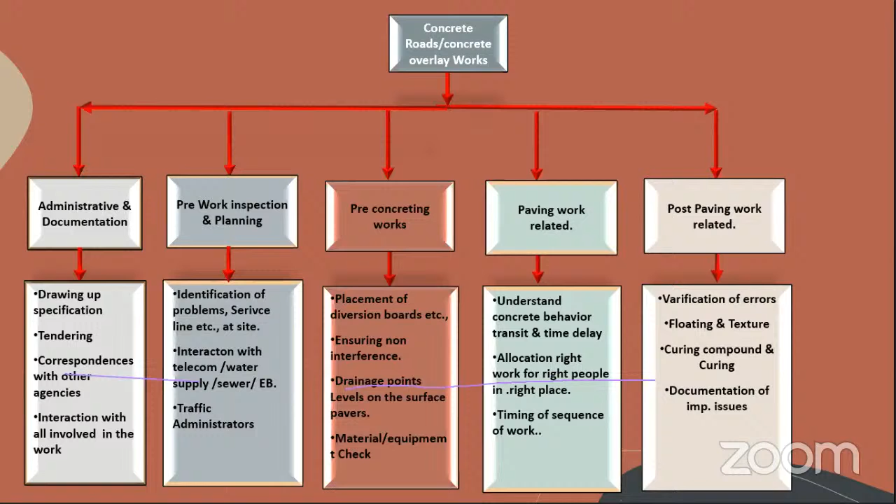That is very important. Then, geotechnical investigation, nothing much to worry about if you know flexible pavements, you are going to do this too. One thing we have to look out for in all these things when doing geotechnical investigation is that the behavior of this pavement is rigid. It is not flexible, it doesn't go down and come back like a spring. But there are some regular things to consider.

What you see here on the left hand side is a typical urban scenario. The old road was still here, and this was expanded. When the extension took place, not much soil investigation was done. The system was blindly followed, and they found that consolidation of soil was happening, and rutting appeared. The other thing that could happen, in case of black cotton soils, is expansion. You might have to re-strengthen a few things, and there could be a necessity of putting in duct lines across.

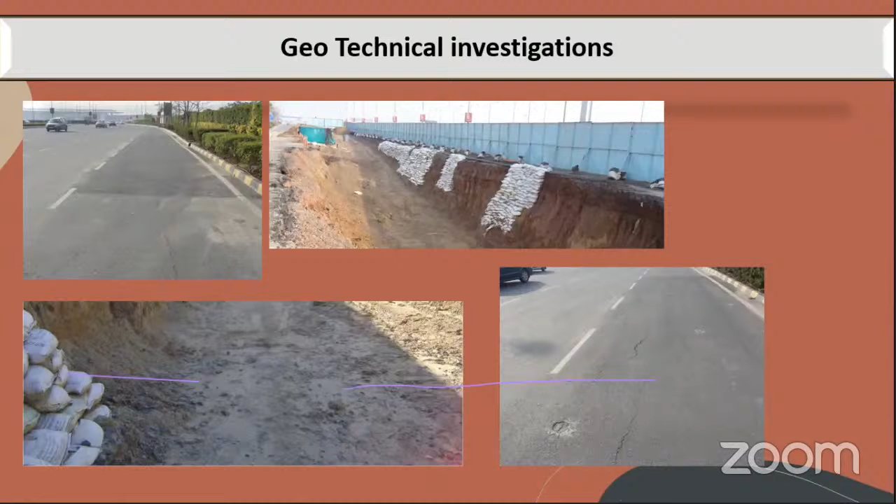So this is a close-up of the rutting that is happening. You can see here the road is intact, but suddenly on the other side, your road is not. So what has happened here is, unlike the other road where the expansion happened towards the shoulder, here the expansion is happening in the center. Probably this would have been an island in between two-way traffic, and they reduced the island to a median and occupied it. Again, the same mistake has happened as before, and you can see the rutting that is happening.

So this is what all geotechnical people will say: it is arguably the most complex material to understand. You have to understand the geotechnology or mechanics of the soil there based on your requirement for rigid pavement and the kind of loads that are coming in. Yes, there are established methods to evaluate the soil, established methods to analyze this evaluation, and established methods of overcoming these problems.

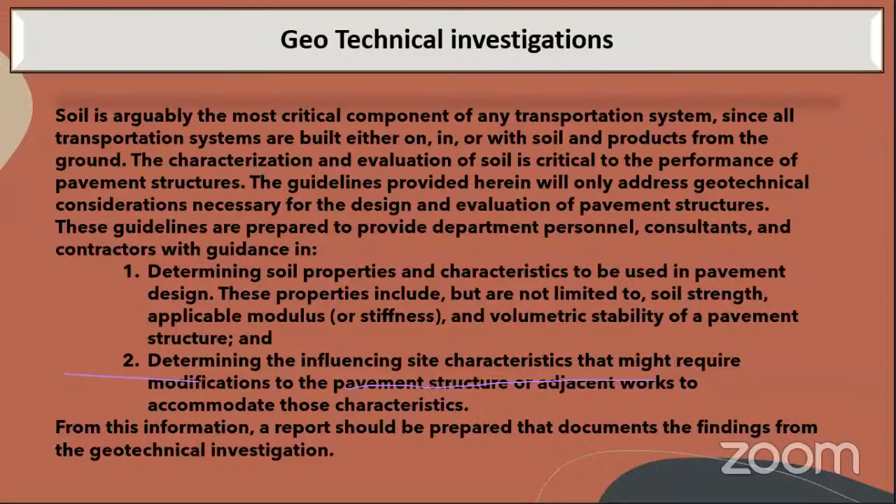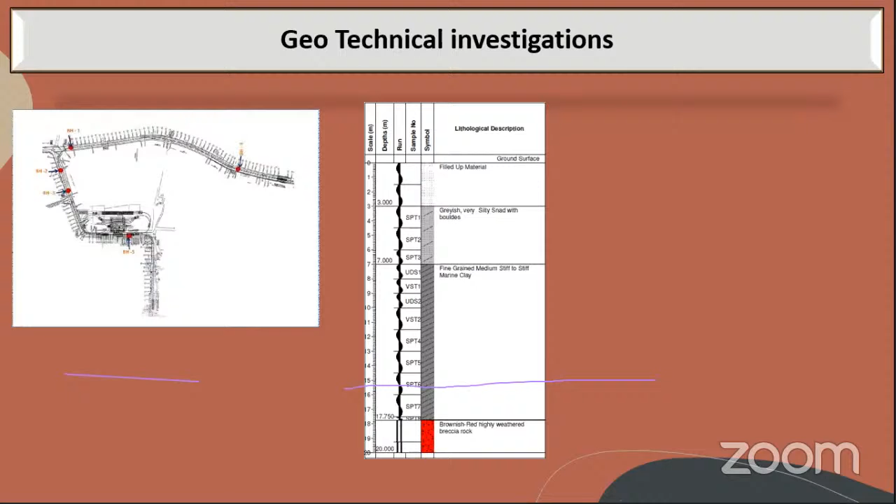Typically, these are some pictures that I have got, which I'm sharing with you. These are borehole details that we normally take, especially in case of highways. And when it comes to hilly areas, hilly roads, roads on the mountains, roads on hills, roads in the so-called Malnad area, there the problem is different.

The soil there could be strong enough, but when you cut across for a road, there is water which would have been flowing on the surface of the soil gradually down the hill. Now that you have cut it, the water jumps from one level to another and gains momentum.

And typically in those areas you also see landslides. So correspondingly, you will have to look at the slope at which the cutting has to be done, what is the soil inside the slope, and the very important thing is that you cannot stop water, so you have to make way for water to go across the road.

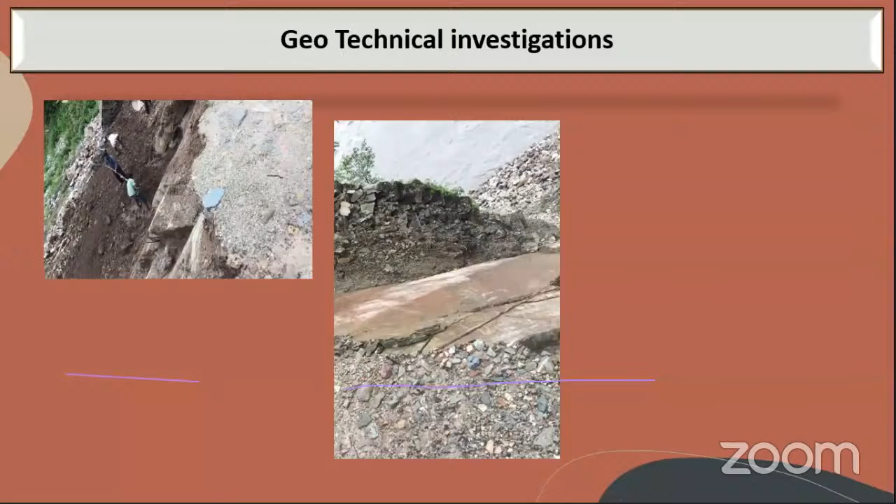These are things that have to go into the documentation, go in as an input to the designer, like I want a culvert, I want a cross drain, I want a surface drain, I want a stormwater drain. All these things will have to come in. This is typically the same thing that is required even for a bituminous road.

But the catch here is you have to look at this data with the behavior of concrete road, not just as a pavement. There are some very established methods available. Soil improvement methods, there are chemical as well as natural ways of stabilizing soil. Apart from consolidation, rolling or compaction, you also have chemicals that can be added into the soil to make it harder, more impervious, and give more reactive strength for the upper surfaces.

For stabilization of soil, these days we are trying to use a lot of fly ash and GGBS, or a combination of both, so that more natural materials are going in, thereby the stabilized earth will give a better sub base for the road.

Drainage beneath your pavement structure and the natural soil is very important. In many cases I have seen, they lay a filter bed, they lay a drainage layer, but the base of the drainage layer is not given enough slope for the water to run off to the lower end. They keep the base of the drainage layer flat, the top of the drainage layer also flat, and then construct the pavement.

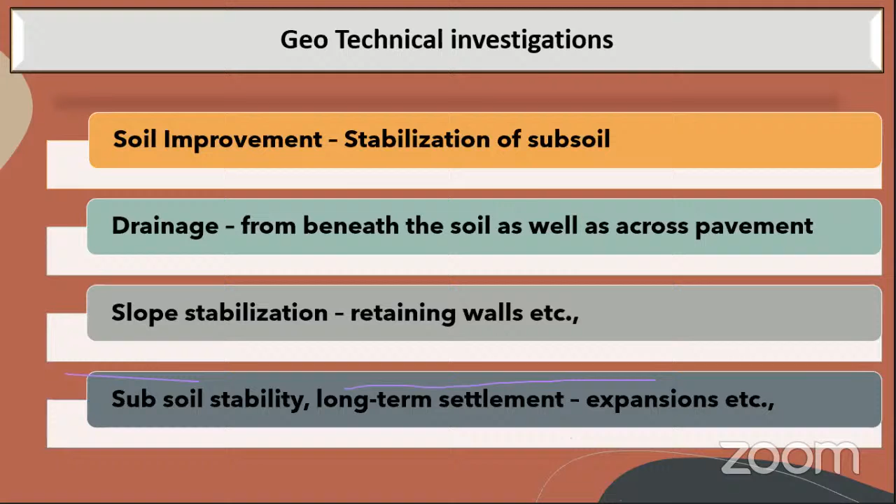Then very important is subsoil stability, which is a normal thing, because it is a normal feature that all of us look at. I have put it at the end.

Now, when it comes to urban scenario, you have got a lot of underground things. You have to look out for the electrical lines, communication lines, water supply lines, and the sewer lines. What is below the existing road, you have to know, because before you upgrade your road into a CC road or a white topping road.

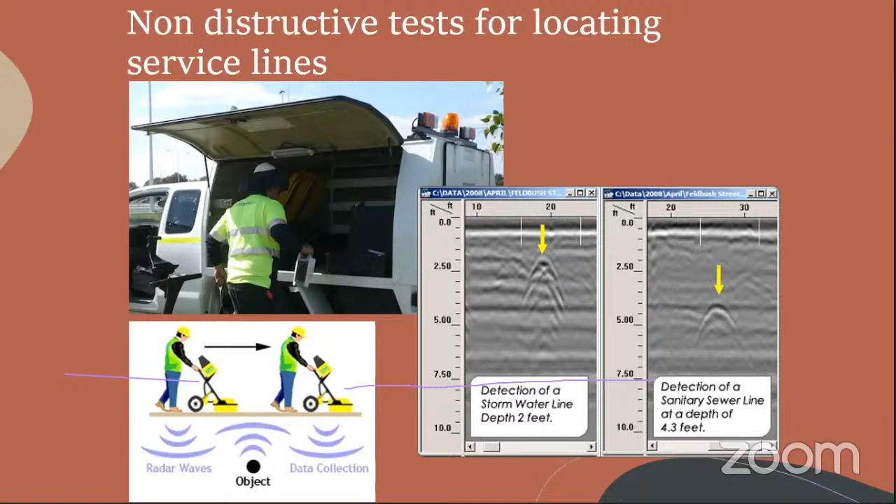You can see it will give you what type it would be - a stormwater drain - and what is the depth of that. The other one will give you sanitary lines. Very important, modern day software available for this will tell you about a discarded sewer line, because as the utility grew up, they have gone for a larger diameter. There is a pipe which was being used and it is no longer used. That is also given by this.

So that is there. Next one is administrative. You have got everything, all codal requirement, but the only thing is you have to have proper documentation.

Let us go here. In case of tenders and documents, Ashok, you can tell me wherever I have to stop, because I have not put an end slide today. Okay sir, okay sir, not an issue sir.

You can stop appropriately, the rest we can take up next week. Actually, one more session we have planned. Jyoti is coming in. Yeah, okay, you can find a logical stop.

Let me complete this documentation part and then we will put it to the next session. Okay sir, fine sir.

In your specification document, number one is material to be used. Why have I put material to be used? Because that will lead to the type of equipment you have to adopt, and the secondary equipment required. In case of bitumen road, rollers, pavers and so on. Whereas when it comes to concrete road, you have scaffolding, formwork, curing compound sprayer, water curing methodologies. All this equipment will have to come.

So then who is liable? What are the liabilities of the contractor? I'm adding liabilities at the beginning itself, because many things get missed out, and I have seen contracts going into dispute for a very long time.

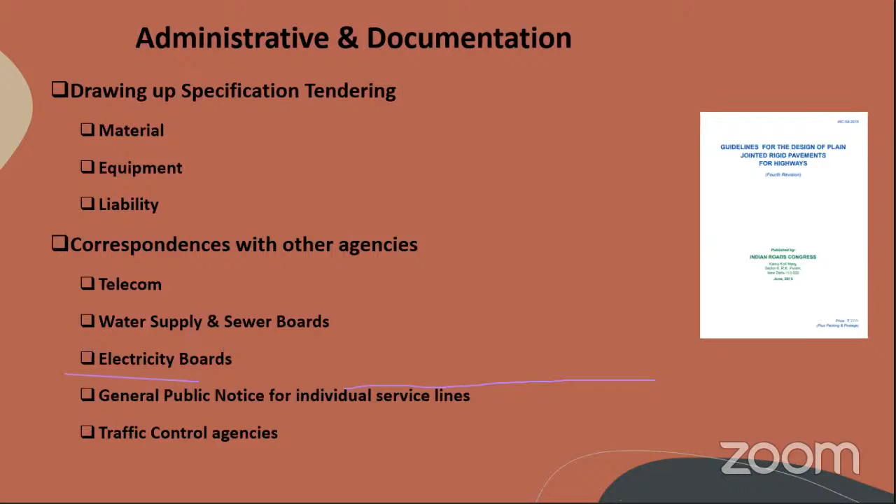That is something. And traffic management - otherwise I'll tell you what happens. I remember myself and one of my close colleagues, we used to be at the site for days together, not going home, sleeping in the mobile concrete lab, all these things. Our head used to be like this, because in the earlier days the documentation process did not include many things.

Then interaction is involved - again you have to look out for all the contractors. At that time there are codes available which would give you a fair idea of what is there. I will stop here, because from here the actual construction process starts.

These are the documentations. At the end of my second lecture I would make a PDF of this presentation, so that it would be a valid document for all of you. I have a bad habit of not writing much on screen - I won't write on my PPT unless it is a very valid point. I don't write details on my PowerPoint slide, because you will have to remember what I talk about, and probably the picture or illustration will take you back.